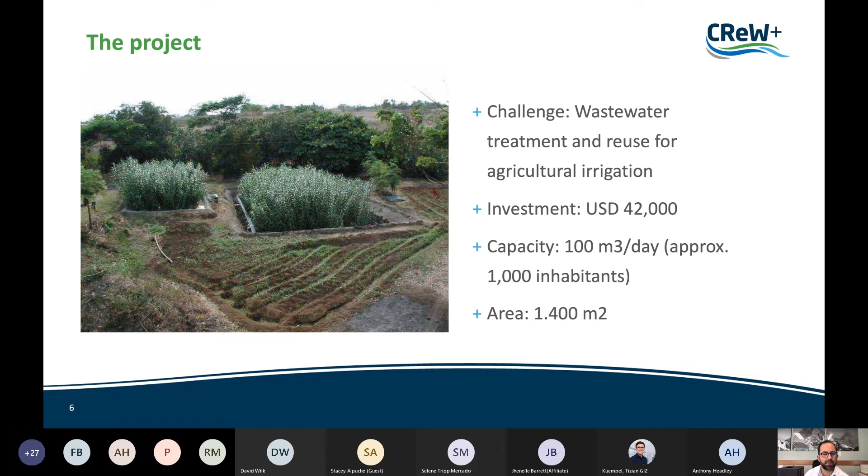Then the sedimentation tank, in this case an Imhoff tank, which we will also look at in more detail. In parallel, we separate the sludge that is sedimented in the Imhoff tank and also the grit chamber, and this goes into the sludge drying beds. After the primary treatment, after the Imhoff tank, then we have 4 constructed wetlands in parallel.

The idea behind this was to have 4 units in parallel to try different plants within the constructed wetland and evaluate the differences, and also to have more resilience in case one of the biofilters got clogged - then you have others to move the water through.

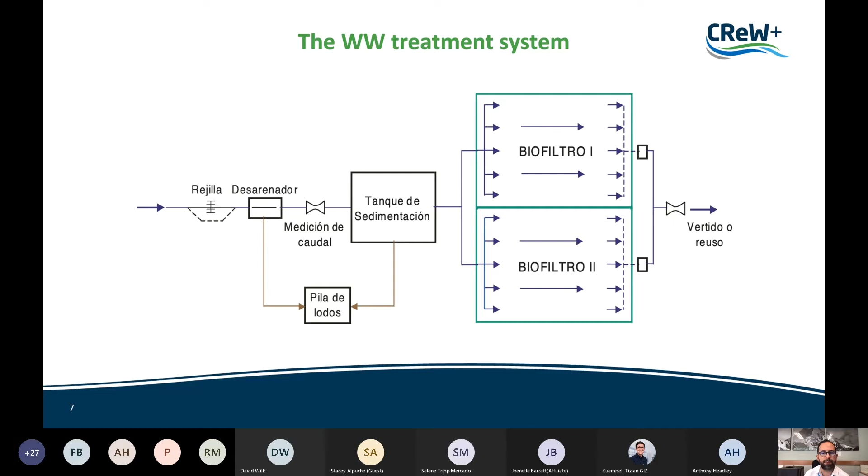Then we have the grit chamber, in this case a rectangular grit chamber, also with manual cleaning. Any sand material that would settle in a short period of time will settle here, and it won't go through the Imhoff tank or the wetland. The idea is that all heavy particles should be separated at the grit chamber.

As I mentioned before, it's very important to have some device to measure the flow of wastewater coming into the treatment plant, because without means for measuring flow, we'd be operating the plant without knowing how much water we're treating. If we want to determine the efficiency of the plant, the first measure we need is flow measurement—we need an idea of how many cubic meters per day we're getting. When you have a channel, you can use a Parshall flume to measure the flow, or a small weir. Or, more sophisticated, especially in larger plants, you can use an ultrasonic device to measure the water level at your inlet pipe or canal. But it's very important to measure and register the flow.

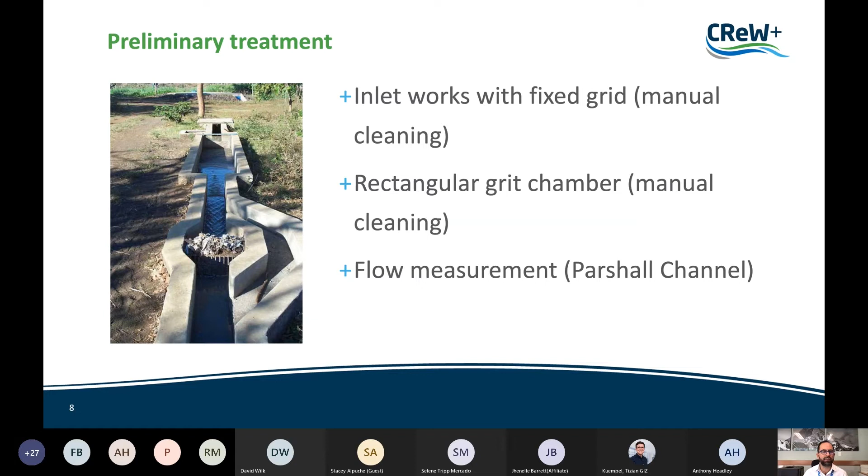Then we have the primary treatment, in this case an Imhoff tank. Imhoff tanks have been used for many years—a very well established, robust technology. In this case, the hydraulic retention time of this Imhoff tank is 2 hours. That means that, on average, water stays in the tank for 2 hours. It's not a batch process, of course, it's continuous, but one drop of water going into the tank will get out 2 hours later on average.

Because the flow also varies along the day or week, especially when working with anaerobic reactors, hydraulic retention time is very important to give the bacteria enough time to digest the wastewater. In a septic tank, for example, the time will be more. An Imhoff tank needs about 2 hours, and for an anaerobic upflow sludge blanket reactor, such as a UASB reactor, you might need between 6 and 8 hours retention time. So it varies according to the technology and specific design, but it's a very important parameter for designing any anaerobic reactor. It's also related to temperature—the colder the temperature, the longer the retention time should be, and the higher the temperature, the less time you need. So in places with tropical climate, you can save on total volume because you need less retention time compared with colder places.

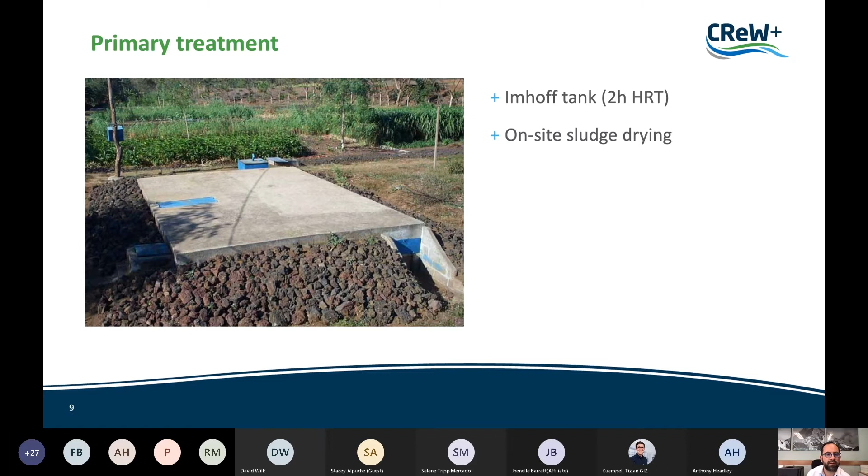In this project, there's also on-site sludge drying beds. All the sludge that settles at the bottom of the Imhoff tank can be taken out and brought to the sludge drying beds, where you basically dehydrate it. The liquid that comes out of the sludge can go back to the treatment plant, and once the sludge is dried, you can use it as a soil improvement, also for agriculture.

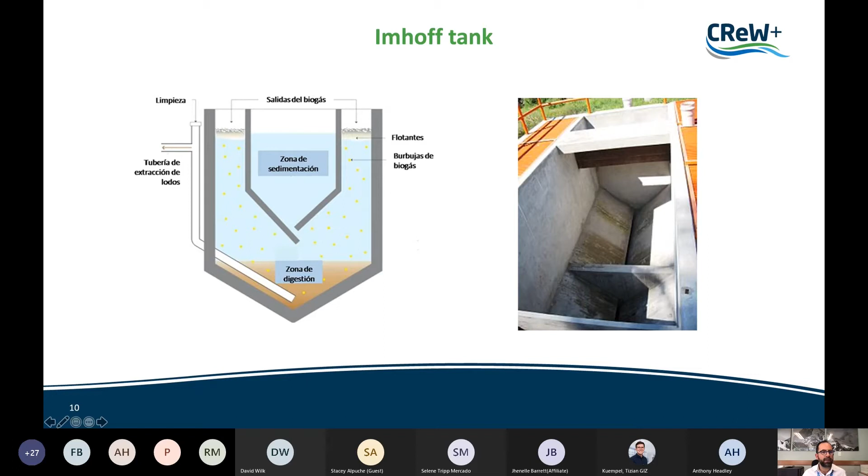On the picture on the right, you can see a detail of the Imhoff tank. These baffles are designed so all the scum and biogas go to the sides, while the clarified effluent goes to the center chamber. That way we separate the solids at the bottom—any fat, grease, or scum goes up to the sides, which are covered by this yellow lid. In the center, we have the clarified effluent that goes to the next step, the secondary treatment: in this case, a horizontal flow, subsurface horizontal flow constructed wetland.

This means that in this type of wetland, the water will flow along the wetland and underneath the surface. So that's what we call subsurface horizontal flow.

This is different from the vertical flow wetland. In the vertical flow wetland, we have a set of pipes on top of the wetland, and those pipes distribute the water, and the water will trickle all the way down. In this case, this is a horizontal flow wetland, so water goes into one extreme of the wetland and will go out to the other extreme.

You can walk within this wetland amongst the plants, and the pebbles here, the gravel will be totally dry because the water level is usually between 15 or 20 centimeters below the surface. So you can just walk on top of the wetland and everything will be dry. There's no odors, there's no mosquitoes because there's no exposed wastewater to the environment.

At the inlet of the gravel filter, we have a coarser gravel in order to ensure a proper distribution of the water using the full width of the constructed wetland. Then we have smaller gravel through the wetland, and at the outlet we go back to coarser, larger diameter gravel in order to ensure a good collection of the treated wastewater at the end of the wetland. And this pipe goes up in order to regulate the water level of the wetland.

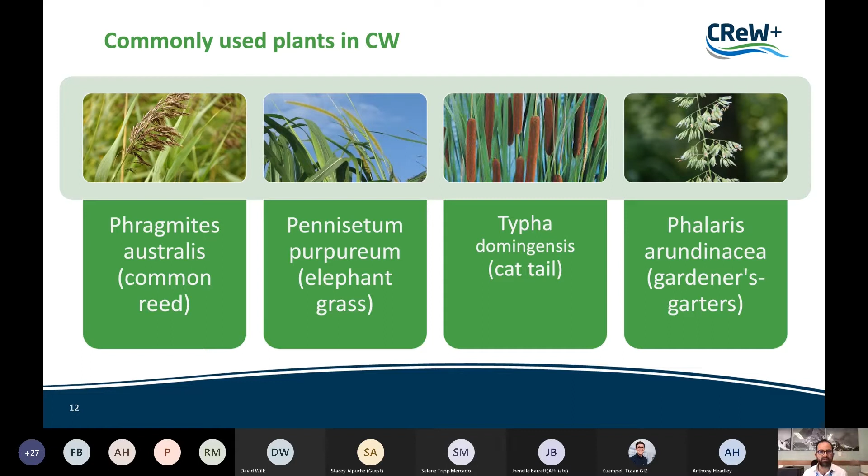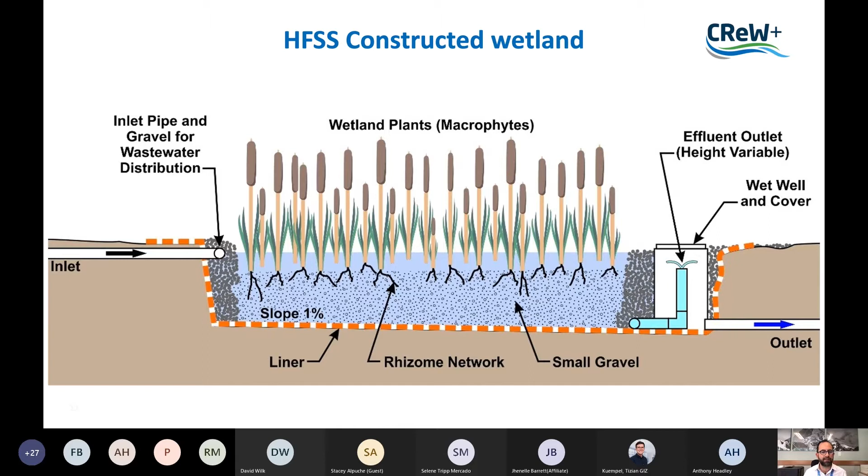Also, what the plants do is they get oxygen from the air, and that oxygen gets injected to the roots. So that is good for the environment of the wetland, so it's not so anaerobic. You get more oxygen into the wetland when you have a planted wetland like this one.

Now, about the efficiency, the treatment efficiency of these wetlands is very high, actually, as long as you dimension these wetlands correctly. You can get very high removal rates. For example, 98% here as an average of BOD5 reduction. So we can reduce 98% of the organic load coming into the wetland.

Now, these efficiencies here are actually for the entire plant, including the Imhoff tank plus the wetland, right? So in the lines in the graph here, you can see the work that is being done by the Imhoff tank to the center of the graph, and then the second part is the work being done by the wetland itself.

So as you can see, very high removal rates for BOD, COD, and total suspended solids, and less efficient rates for nitrogen and phosphorus removal. Although when you have a planted constructed wetland, then you get these numbers. If we didn't have plants, then we would come out of the plant with higher levels of nitrogen and phosphorus. So the plants themselves are taking up some of the nitrogen and phosphorus contained in the water.

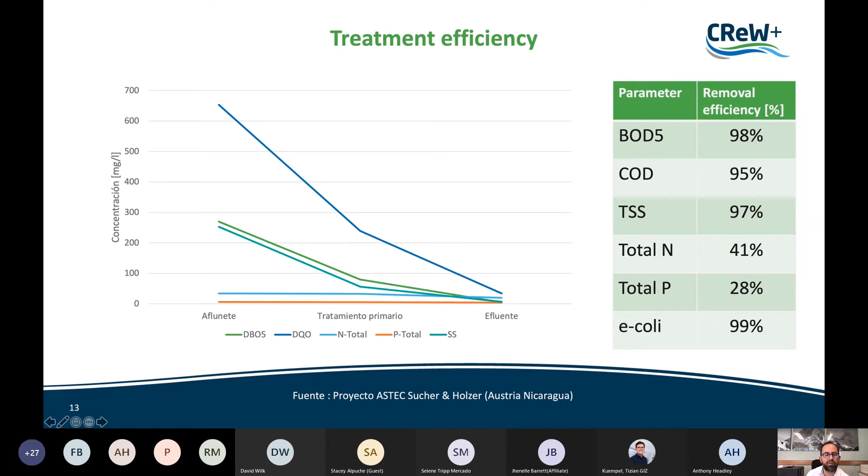Now, finally, E. coli removal rate is 99%, which sounds very high, but a 99% removal rate of E. coli is usually not enough to have a totally safe effluent. So even though we're removing 99% of E. coli, we will end up with some E. coli still left in the effluent, as we can see in this table.

So this table is to compare the absolute values, the concentrations of the wastewater at the inlet and at the outlet of the plant. And on the rightmost column, we can see the control value in Nicaragua, to which we have to compare the effluent quality, right? So for example, conductivity, we should leave the treatment plant below 2,000 of conductivity.

On average, this plant was removing salts to 546, so it complies, right? And as you can see, all the measurements, all these parameters comply with the norm.

Now, this standard in Nicaragua is for general discharge and for reuse when you discharge the treated water to the ground. If we were to discharge to a lake, for example, these parameters would be much more strict. For example, instead of having a control parameter of 120 milligrams per liter of BOD, if we discharge to a lake, maybe this would go down to 20 or 30 milligrams per liter, much stricter limits in order to prevent pollution to lakes.

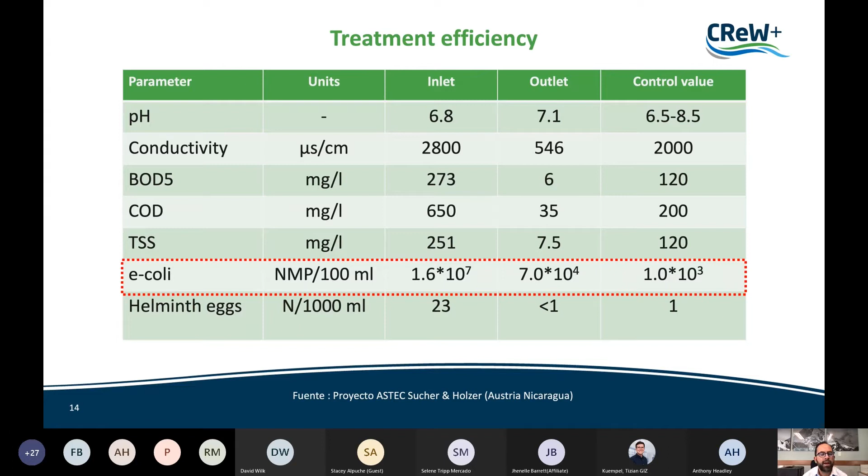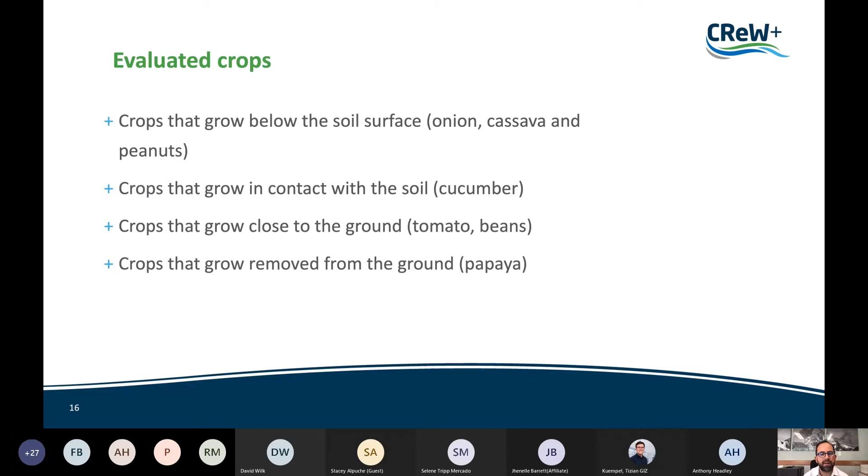And here are some lessons learned from this case. First of all, plants take advantage of the nutrients, nitrogen and phosphorus, which are present in the effluent. No additional fertilizer was used in this case, so all the crops took the nutrients from the wastewater and, of course, from the soil.

We can see the conservation of water resources here. The reuse of water reduces the pressure on surface water sources, also on treated water. In many countries in the Caribbean region, there are desalination plants which use a lot of energy, and you end up with very expensive water. So it's much cheaper to irrigate with this type of water, or any wastewater you reuse for irrigation will reduce pressure on these other expensive water sources.

Also, the water flow in a treatment plant, especially if this flow comes from wastewater from a bunch of houses or a small population, is very reliable and stable during the year. This allows farmers to produce all throughout the year when you have appropriate weather conditions. The flow is very steady, so the water offer is very stable.

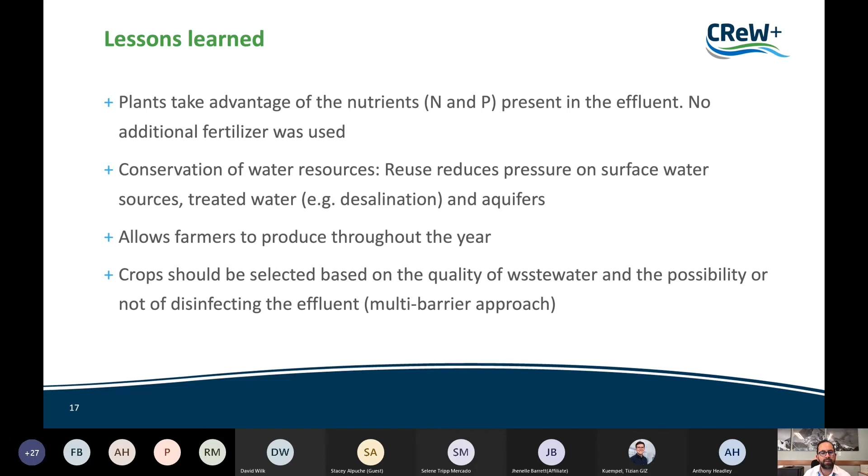And finally, crops should be selected based on the quality of the wastewater and the possibility or not of disinfecting the effluent. So this is where we use this multi-barrier approach that is recommended by the World Health Organization. The crops recommended for restricted irrigation, when you don't have a disinfection step, are vegetables, fruits, and basic grains that are washed, peeled, or cooked before consumption, industrial crops subject to drying, roasting, or extraction processes, fruit trees, and also tall stem plants and forage for animals. All these crops are appropriate for wastewater reuse for irrigation when you don't have a disinfection step.

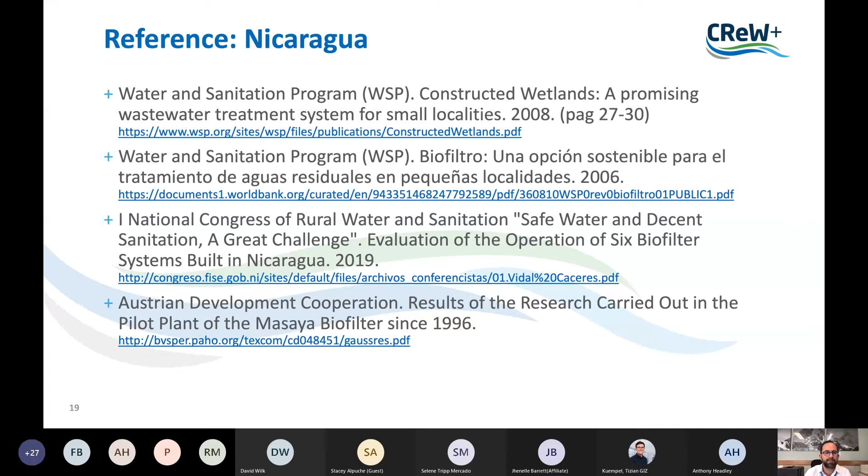As I mentioned before, this is a very well documented case, so you can go into these links and look at the detailed monitoring process of these plants, the removal efficiencies, the differences between crops, and so on. So this was the first case from Nicaragua, a very appropriate technology for tropical climates, the constructed wetlands.

Next we will look into an NGO project. This NGO is called Soil in Haiti. They have worked since 2009 in Haiti. Soil means sustainable, organic, integrated livelihoods—a very sustainable ecological approach. In this case, they base their operation on urine diverting toilets. The challenge they faced was to provide sustainable sanitation at very low cost where there were no sewer networks. And they worked all through the earthquake in Haiti, so this also works as an emergency technology.

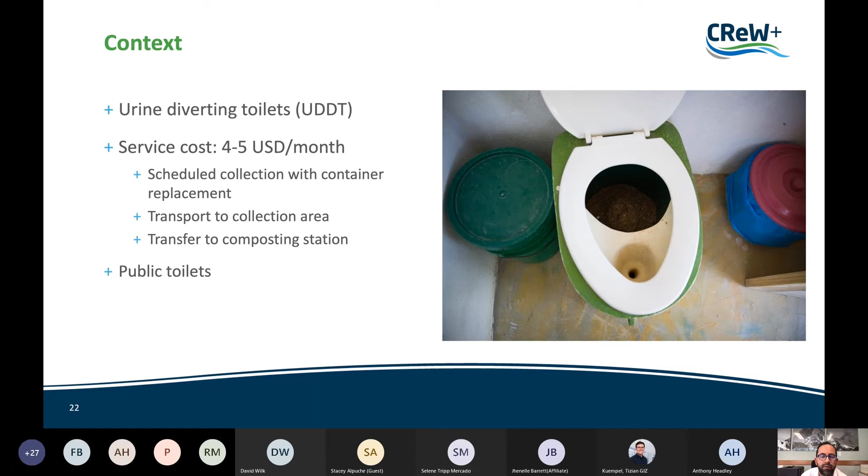There's another bucket within the toilet that has to be periodically removed. But interestingly, when you separate urine from the feces, you don't have bad smell problems, because the problem is when you mix the feces and the urine, you get a very liquid effluent, and then the ammonia from the urine especially starts smelling very bad. So as long as you infiltrate the urine or lead it towards a closed container, and you have sawdust on top of the feces, you don't have any problem with bad odors or flies.

The first composting station built by Soil took place in 2009. Soil has carts and trucks to pick up the sludge from the households, and then they take this to a composting station. First, all the excreta plus compost is placed in wooden boxes for a 2 or 3 month period, where the composting continues. After that, it's transferred to composting piles for about 6 months. Each composting station processes more than 50 tons per month.

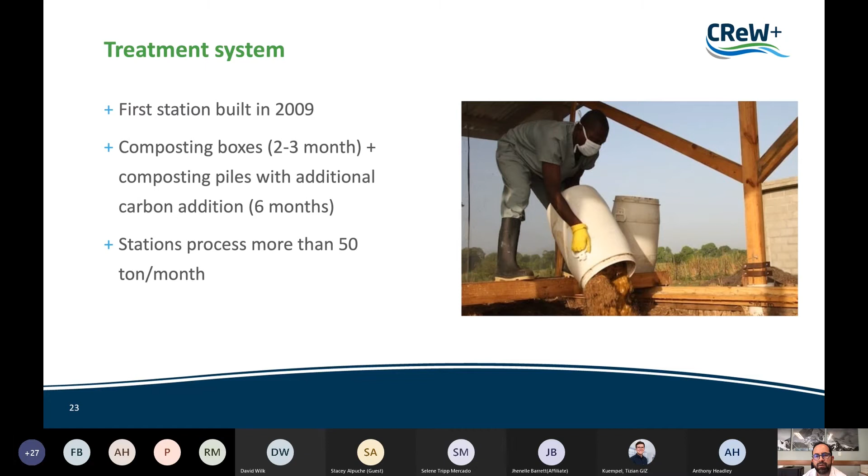While the composting process takes place, the temperature goes up close to 50 or 60 degrees, so all the material gets disinfected because of the high temperatures.

Here are some numbers on the main investment costs of this type of system. The composting plant itself costs about $150,000. The trucks were around $25,000, and the small carts around $200. So small carts do the collection from each household to a centralized place, and then from that centralized station, the big truck takes it to the composting station.

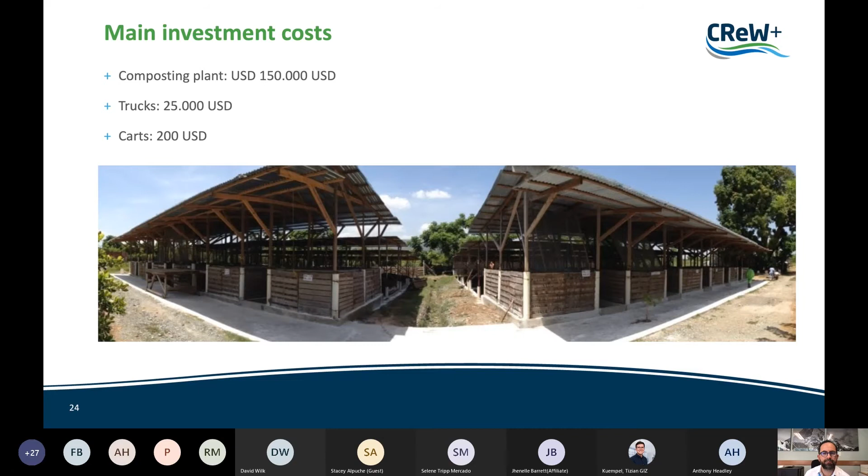The challenges they face are to improve the efficiency of all their processes, and they are considering subcontracting some of the activities so they can gain efficiency.

Now we can take a look at a very short video from Soil, featuring Sasha Kramer, the founder of Soil in Haiti.

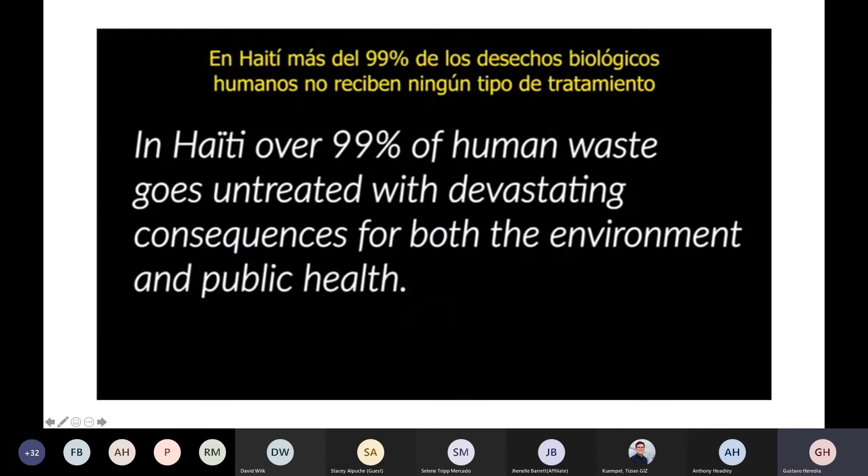In Haiti, over 99% of human waste goes untreated, with devastating consequences for both the environment and public health.

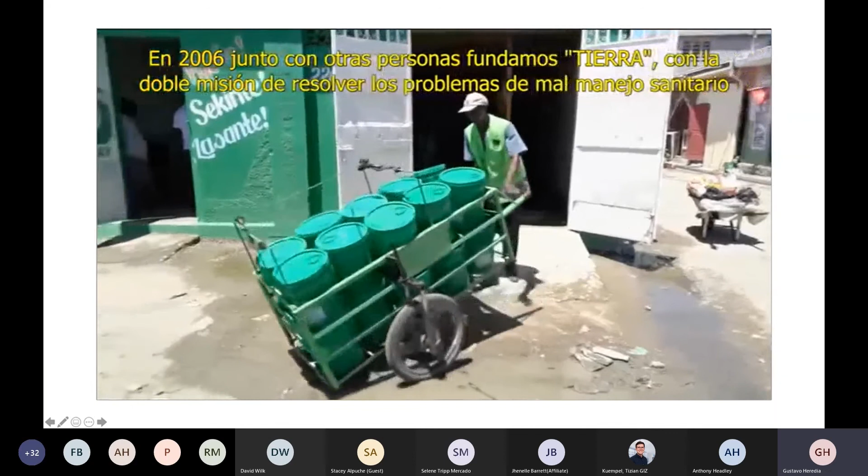In 2006, I co-founded Soil with a mission to simultaneously solve the problems of poor sanitation and declining soil fertility by closing the nutrient cycle and using the nutrients from human waste to restore soil fertility.

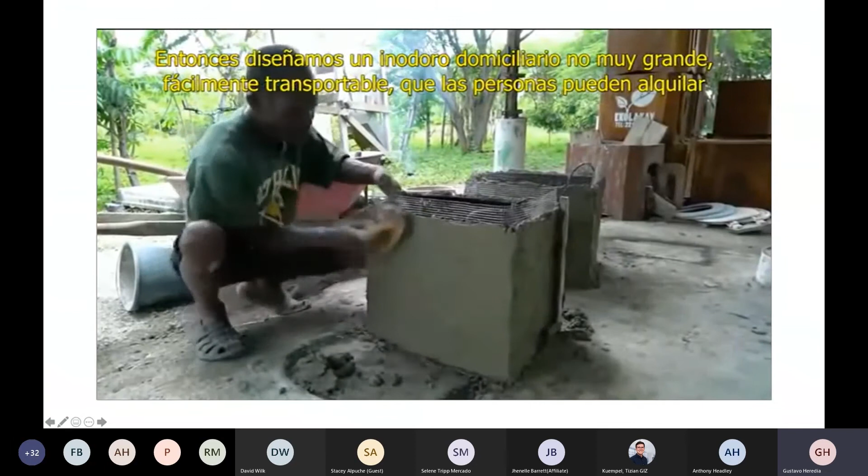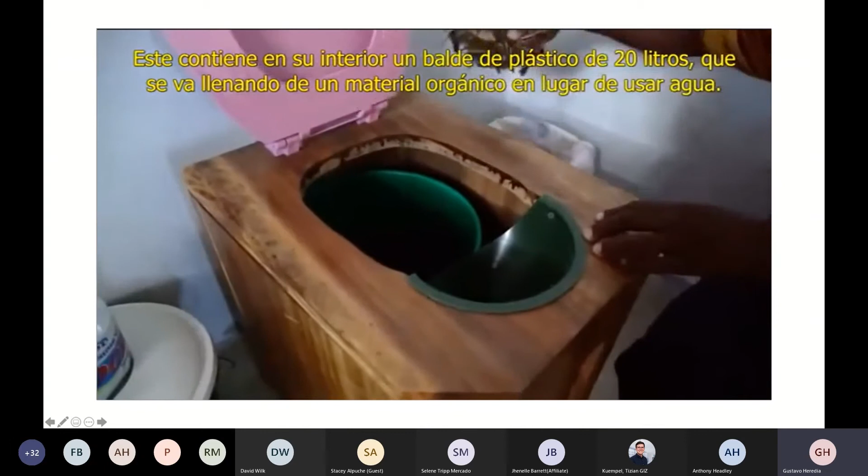So what we do at Soil is that we've designed a small portable household toilet, which people rent for about $4 to $5 US per month per family. The toilet has a 5-gallon bucket in it, filled with a carbon material that's used for flushing. Once the bucket is full, we take it away to our compost site where it is treated and transformed.

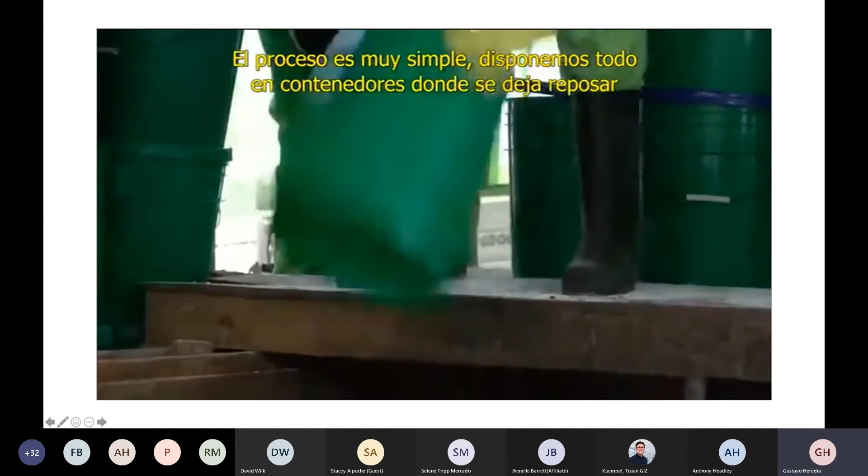It's a very simple process in which we just dump the waste into a bin, and then we step back and let the soil microbes do their work. When there are so many of them in there, it actually heats up the waste to a really high temperature, which kills all of the pathogens that make people ill. In 6 to 9 months, we have an amazing finished product that can go back onto farms to restore soil fertility without having to rely on chemical fertilizers, which take a tremendous amount of fossil fuel to produce.

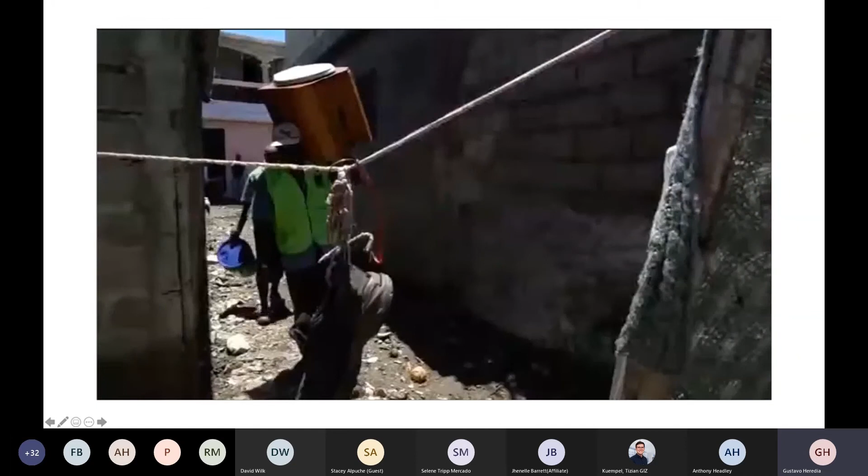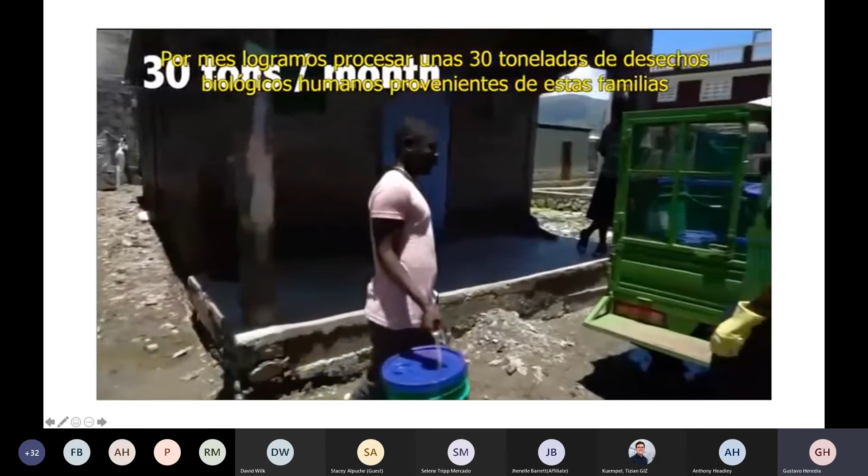SOIL started our household toilet program, called EkoLakay, in 2013. We currently have about 5,000 people using our household EcoSan toilets. From these families, we're treating 30 tons of human waste every month and producing between 5 and 10 tons of compost that we can then sell at the compost site.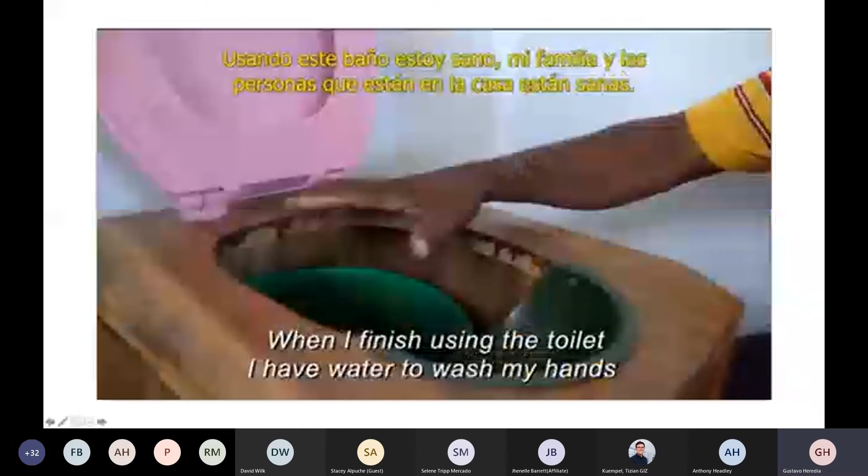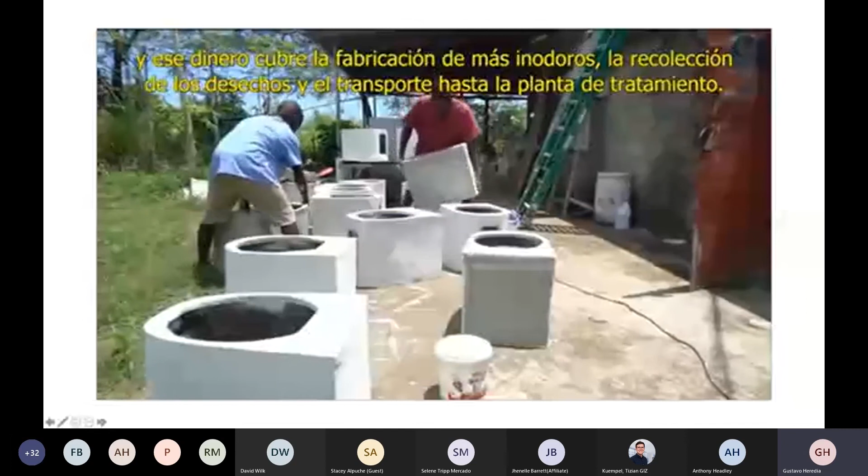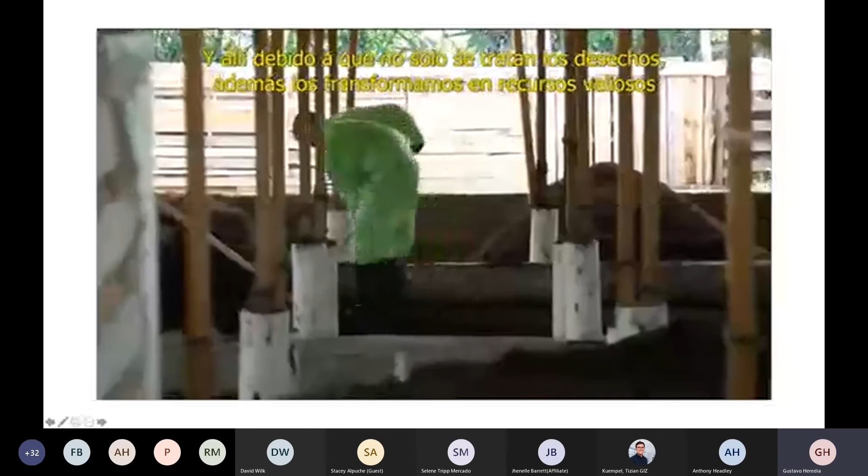Soil's work is to really create a sustainable business model for sanitation provision in dense, informal urban settlements. The way the business model works is that people pay a small monthly fee for this toilet. They don't pay the cost of the toilet; they rent it and pay on a monthly basis. This fee covers the production of the toilet, the collection of the waste, and the transport to the treatment site. And at the treatment site, because we're not only treating the waste but also transforming it into a valuable resource, we can generate revenues to cover waste treatment costs through the sale of compost.

Our vision at Soil is that in 10 years, it will no longer be Soil operating this program, but that the research and development work we've done will have been picked up by private entrepreneurs and communities, not only in Haiti but around the world where solutions like this are needed. These entrepreneurs will be able to make a sustainable livelihood, providing dignified sanitation to people who need it, but also to re-envision the way that we do agriculture.

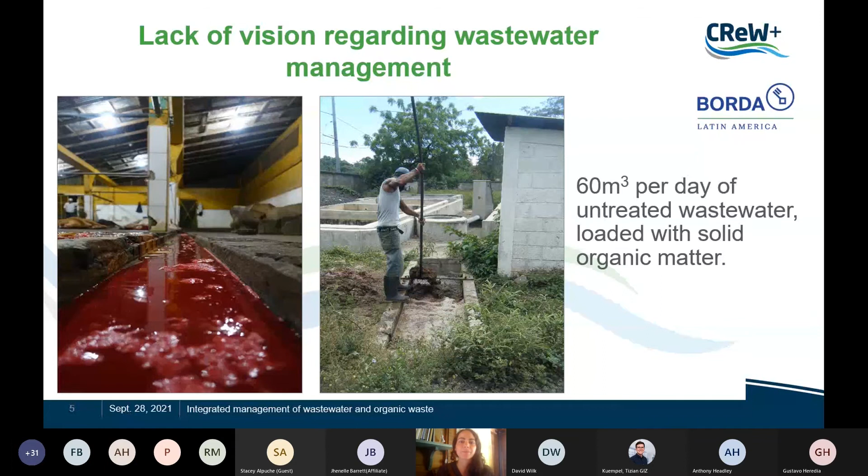Also, there was a lack of vision regarding solid and organic waste management. There were 1 to 1.5 tons of solid organic waste generated every day, and this was all disposed of in an uncovered municipal landfill. Workers were dealing with all this waste directly and with very limited personal protection equipment.

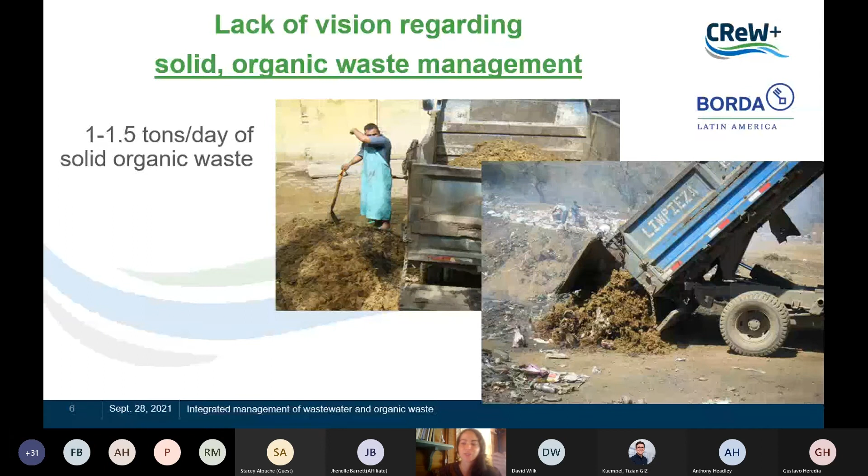The premises where this slaughterhouse is located used to have a vacant lot of 1,200 square meters, which was in disuse, and we decided that this was a space that needed to be used for a better purpose.

For the strategic plan and execution of the project, this was initiated by the municipality and the management department of the slaughterhouse. They knew of the social pressure urging for an improvement of how they were dealing with this waste, so they reached for counsel and advice through the cooperation programs they participated in. This is how they got to Borda through the Hamburg City Twinning Project, and we also included the university as part of the stakeholders contributing to this project.

All the stakeholders worked together on developing a strategic approach for a comprehensive solution to the problem. This solution needed to be based on three premises. The first was that the solution needed to be long-term and sustainable, meaning it couldn't be just a quick solution. It needed to be well thought out and well planned in order to take into account all the specific characteristics of the project and develop the best solution.

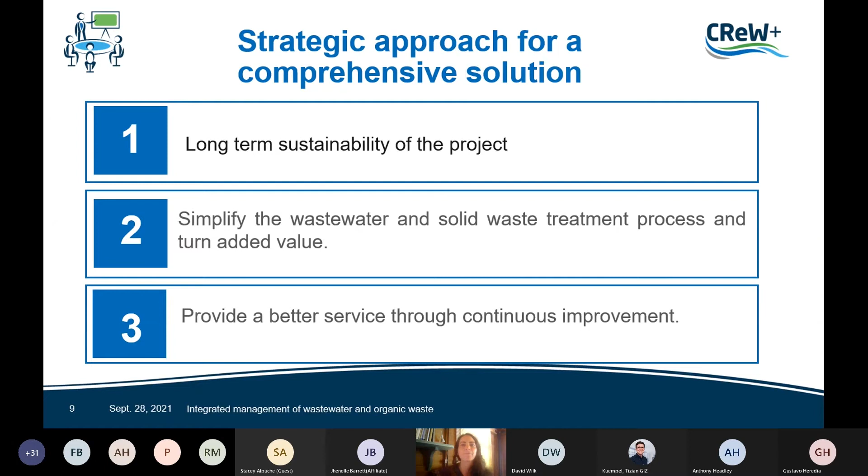Before building or designing anything, we needed a better understanding of the effluent water. So we conducted an analysis where all the different areas of the slaughterhouse were analyzed, taking into account the different characteristics they bring to the effluent: from the slaughter waste, the cleaning of the slaughter cells, the cleansing of the guts, the leather and skin processing, and the guts and belly, which includes washing the manure. The total amount of wastewater is 40 to 60 cubic meters per day.

From this analysis we found that blood was the highest pollutant, with a total COD of 375,000 milligrams per liter, followed by livestock manure, the second highest pollutant because of its contribution to the total dissolved solids in the wastewater.

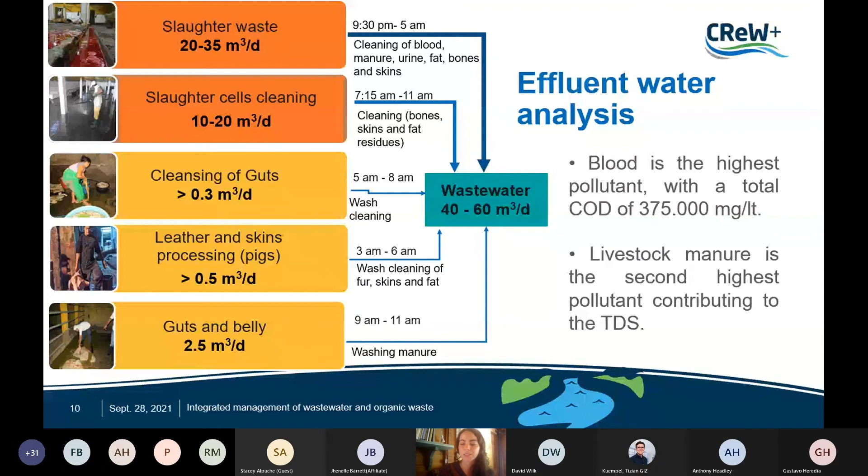After understanding the wastewater we were getting, we designed and implemented this system. At the beginning, it originally worked with one biodigester, where the biogas was contained for further reuse in the slaughtering processes. All the solids from the biodigester were taken into a drying bed, while the water went into a baffled reactor, an anaerobic filter, which also had a containment for the biogas generated, also for further reuse.

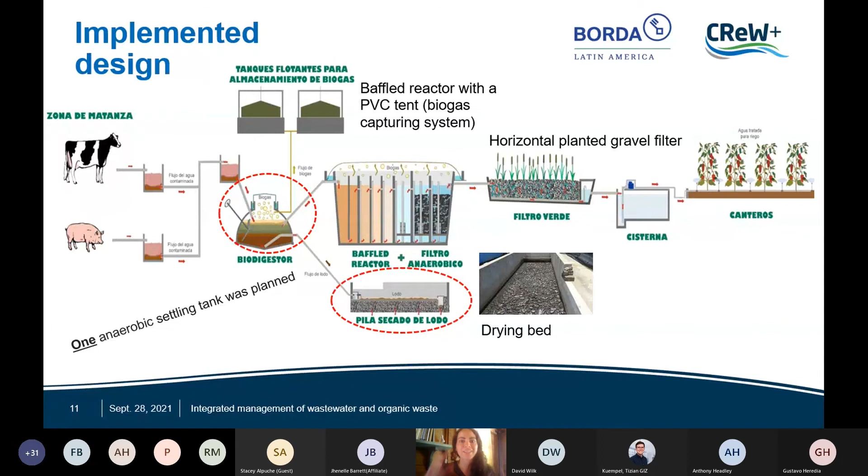Then the water was led into a horizontal planted gravel filter, a tank, and then reused for irrigation of the crops in the orchard that we also built on that large vacant land I told you about before.

So the project was running like this for a bit, but we soon realized the importance of a sustained improvement method, where we need to plan, implement, but also very importantly verify, identify any problems or issues, and take corrective measures.

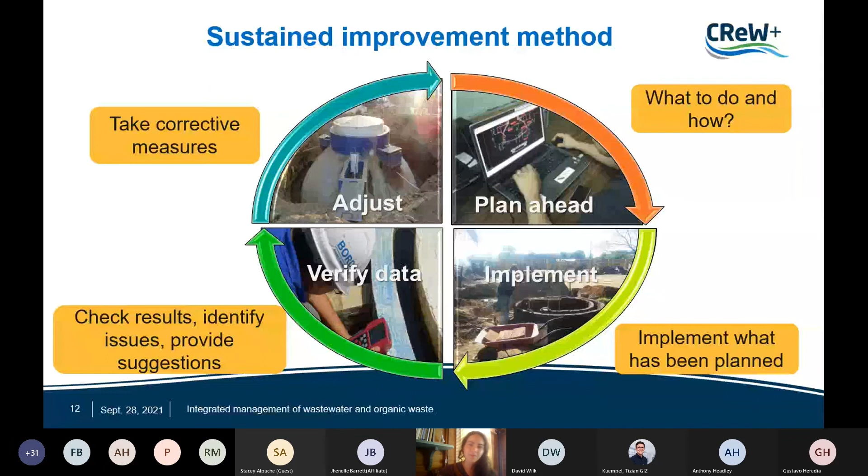In this case, one of the first issues that we noted was the rapid formation of floating sludge layers in the anaerobic reactor. This was because of the huge amount of organic matter coming in, and because of the fact that we only had one biodigester.

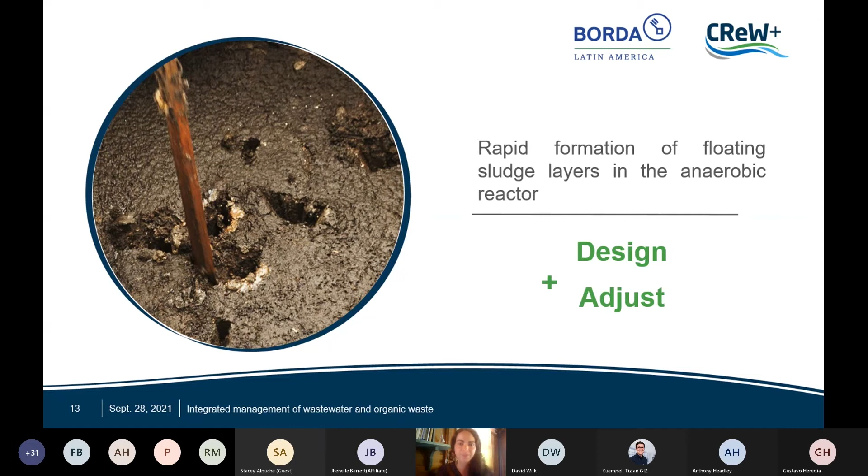So this is where we can realize the importance of the design, but also of this analysis through the pilot projects, and also adjusting to improve the performance of the systems. That's how we got to conduct these adjustments, these improvements of the system.

We added separated wastewater flows so we can have different first treatment systems for each of the areas of the slaughtering. We also added a screen for greater retention of the solids, a grease trap also, and we added 2 more biodigesters so we can improve the capacity of our first treatment.

The biogas again was contained and used afterwards as part of the processes in the slaughterhouse. We kept our anaerobic baffle reactors, anaerobic filters, with the containment of the biogas.

We needed to make some changes in the filter gravel. The problem here was that we were getting a lot of sludge still in the artificial wetland, so we needed to make some changes there also, because it was getting clogged still with all the grease from the blood. So we also made some changes there.

We added some solar power pumps for the irrigation system and also a biogas incinerator, which is also needed as part of the slaughter processes.

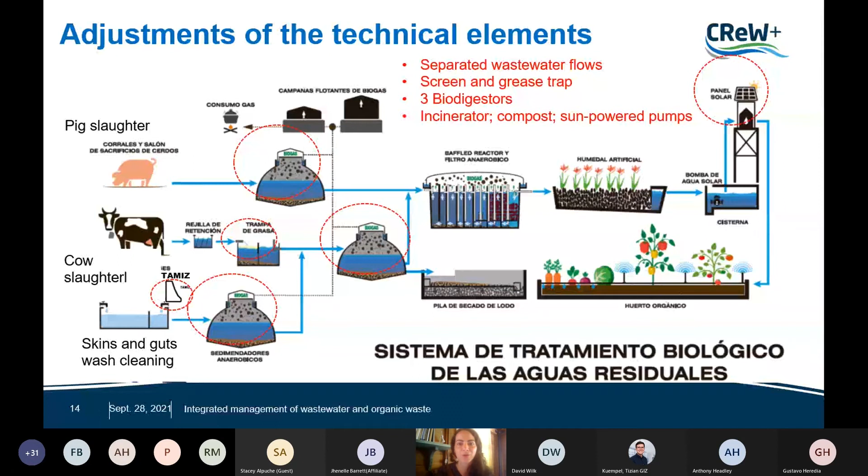So we added this solar power pumping system, which took the water from a tank to an elevated tank powered with solar pumps, and then it was led to the orchard and used by a drip irrigation system.

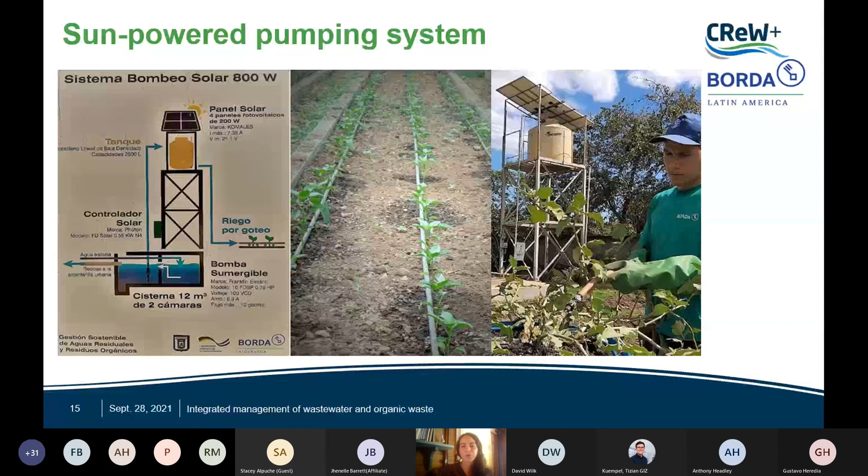This is a diagram of how the reuse system is working now. So after the treatment with the different steps that I already mentioned, the water goes into the artificial wetland and to the elevated tank, and afterwards it's being released in the seed beds of the orchard by a drip irrigation system. This is important because we don't put any water over the plants directly, but over the soil.

And for the organic solid waste, we have this compost yard where we take the sludge that went to the drying beds, from the biodigesters to the drying beds. Then it's taken into the compost yard. It goes into a vermicomposting system, also a storage room, and also a shredder. The shredder allows us to manage better the compost and also take it into sale and also use in the orchard.

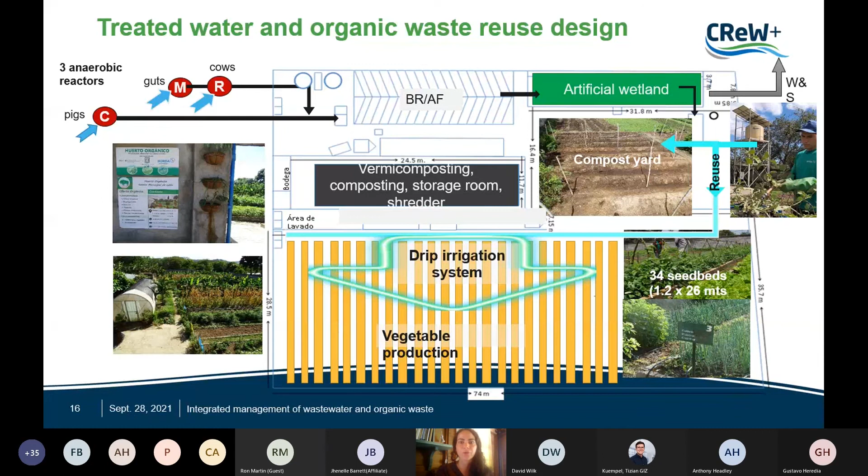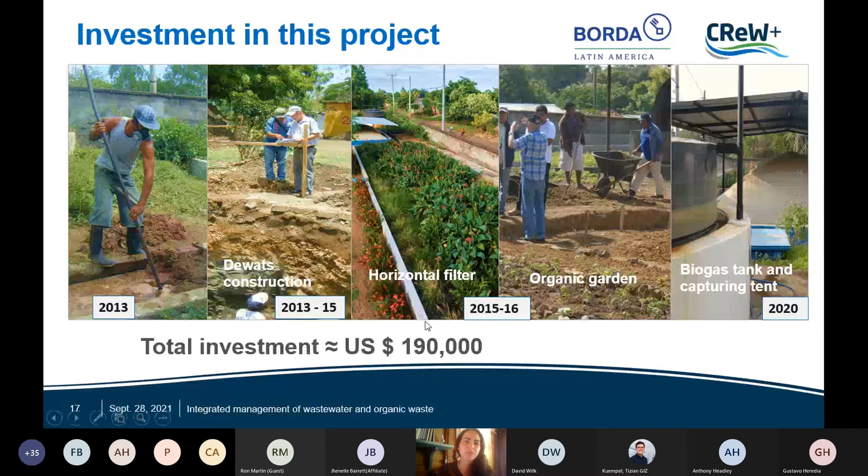So this project was developed and implemented through different phases since 2013 till 2020, and it's still running. The total investment only for the construction was about $190,000 US dollars.

Some of the outcomes and benefits, impacts of this project—well, the most important one, I think, is that 16,000 cubic meters of water is being treated every year. This is water that now is not going untreated into the river, or better off, it's being reused for the irrigation system and also for irrigating the compost when needed.

And the rest of it, that's not being used in the orchard—in the orchard we use about 35% of the wastewater that's being generated, because the water is too much for being reused. Also some part of it, 65% more or less, goes into the sewer system, but now it's completely treated and in compliance with all the industrial wastewater discharge parameters for Nicaragua.

We are also reducing the environmental pollution and also the bad smell that the neighbors were complaining about.

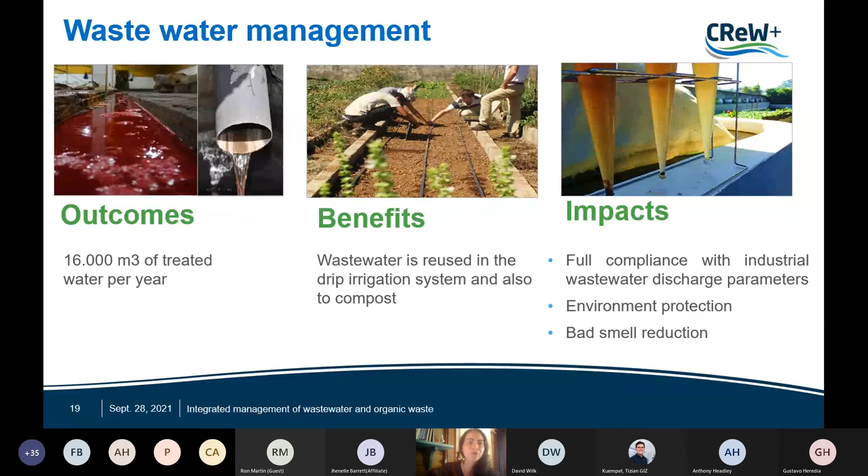For the solid waste management, 400 tons of organic waste are being transformed into compost every year. This compost can be used in the orchard, but also it goes into sale. In this way, we are reducing the amount of waste that was going into the landfill. Now there's no solid waste going into any landfill, and it's all being reused for either the production of vegetables or for sale.

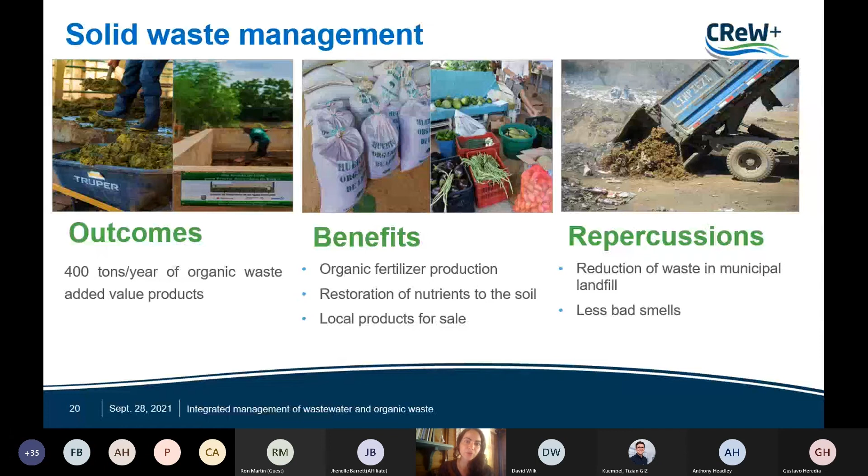Another benefit of the system is the biogas production, which is about 3,500 cubic meters of biogas per year, which is again reused in the slaughtering processes, representing a cutback of 5,500 kilograms per year of firewood that was used to heat the water. And also now we have the biogas incinerator, which is also hugely needed in this kind of infrastructure.

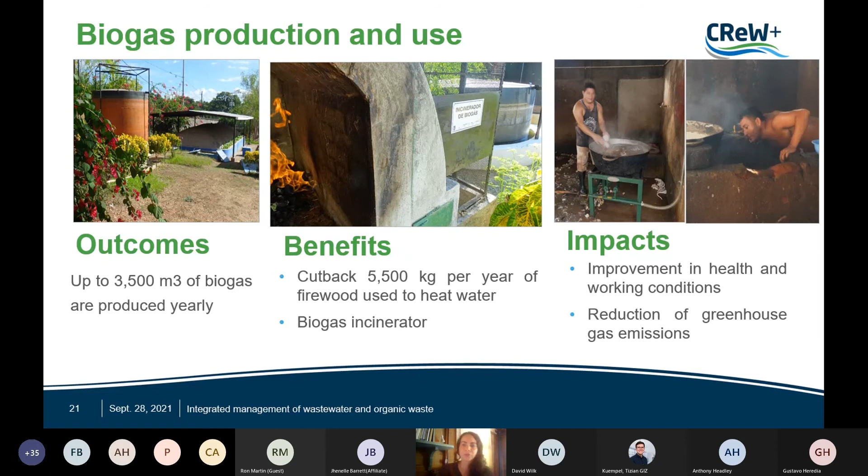Again, some of the positive impacts is that we are improving the health and the working conditions in the slaughterhouse, and also reducing some of the greenhouse gas emissions.

And well, the bonus is that with the sales of the different crops and the compost, we are getting about $7,000 per year, which doesn't mean that our aim was to recover all the investment only with the incomes of the organic products. It's like a plus with this kind of project, that we can generate some product that we can sell and also help the management and the running of the slaughterhouse with this income.

Some of our lessons learned through this project is that the local government gets highly engaged with the achievement of this project, and it keeps interested in maintaining and sustaining this kind of project. We work with an interdisciplinary team building approach, which also meant building strategic alliances and the involvement of different stakeholders, including the universities.

We came up with an integrated solution with an ideal vision of adapting to the current situation and the current needs. We also learned that not everything comes out as planned, but it's very important to analyze why it didn't work and what we can do about it.

We also consider it important to anticipate some budget for any adjustments needed within the process in order to ensure a successful project and also improve the performance of the systems. Also, it's very important to provide a monitoring system that ensures long-term operation and maintenance, and to adapt the technical solutions to the capacities of those in charge of operation and maintenance, mostly the local capacities of those responsible for these activities.

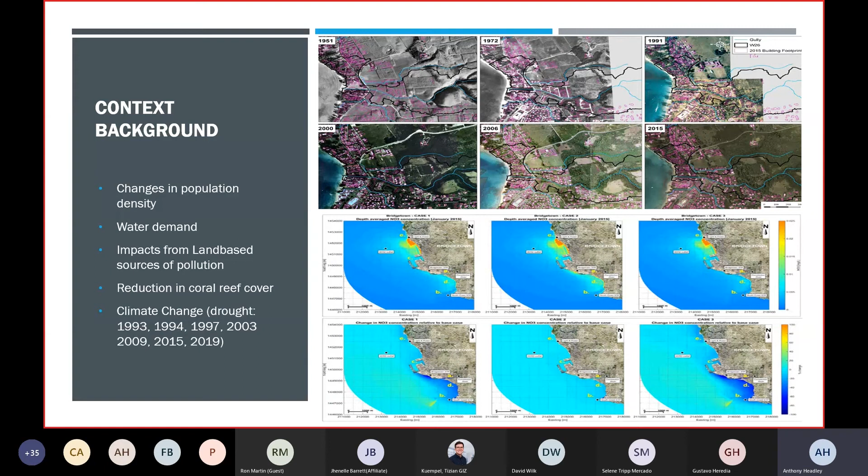And drought issues for Barbados as well, where we have seen over the years several periods of drought that have driven to some extent this process and pushed the need to start looking at all sources of water that are available to us.

Another driver in terms of water reuse is that several facilities in Barbados have actually, based on the availability of water and the cost of water, noting that all of our water for domestic purposes is taken from groundwater sources, which involves pumping from the groundwater aquifers, which is very expensive because of the cost of electricity in Barbados.

So we've seen within the hotel sector, residential sector, and primarily based on the advocacy of both the EPD, Ministry of Health, and the water authorities between 1995 and 2010, several facilities actually started putting in wastewater treatment systems and using some of that wastewater for reuse in terms of irrigation.

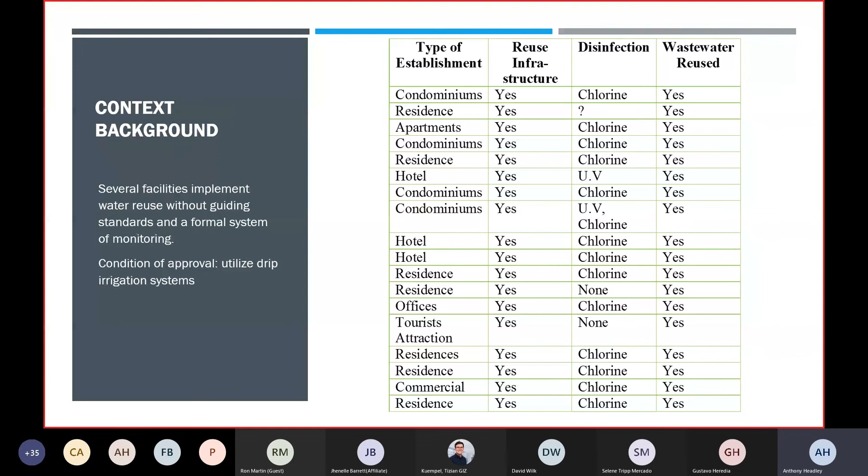The primary tool that was used would have been the Health Services Building Regulations for control, and the main condition was utilization of drip irrigation systems. So a lot of facilities that undertake wastewater reuse have done so generally without a formal system of standards, as well as a system of monitoring.

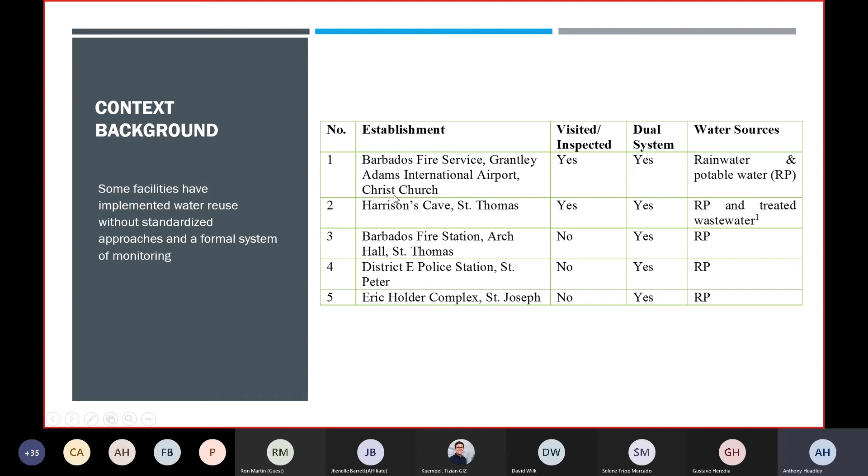Some of the government facilities that have installed wastewater treatment systems or rainwater systems and have looked at wastewater reuse are highlighted here. The one that we will be looking at today will be Harrison's Cave, which is a special area in Barbados that's fairly important to our tourism sector.

These are the legislative tools, and as I indicated, the Health Services Building Regulations and the Town Planning Act would have been the primary tools used to control water reuse in those initial stages, still being used as we speak. But unfortunately, they do not address all of the issues that are associated with water reuse, and particularly some of the health concerns.

Supporting those regulations would have been the existing groundwater protection policy, which is the diagram on the left, and that has been updated in 2020 to the diagram that you're seeing on the right.

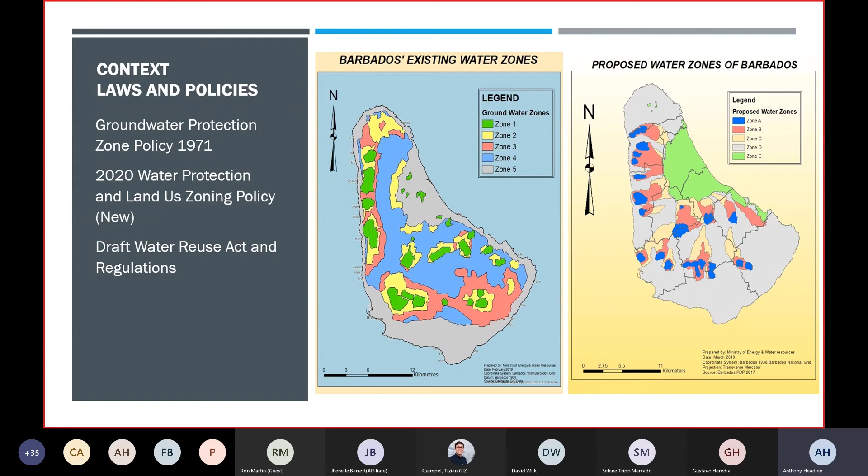Historically, when looking at the diagram on the left, the gray area along the coast, there are no restrictions with respect to waste disposal. This was classified as Zone 5, and disposal would occur from the residential property directly into what we would call a suck well, untreated, where primarily treatment of waste would have occurred in the ground, either through filtration and natural biological processes.

So some of the primary drivers towards the wastewater reuse policy would have been public health, given that it was being practiced within the country, and there were concerns with respect to cross connections, particularly between those facilities that did wastewater treatment and connections to the potable water supply system on property.

No structured legal institutional framework specifically looking at all the areas to ensure safety of wastewater reuse. Then the other driver would have been the Cartagena Convention and meeting the requirements under the Cartagena Convention, and generally to augment the water supply within Barbados.

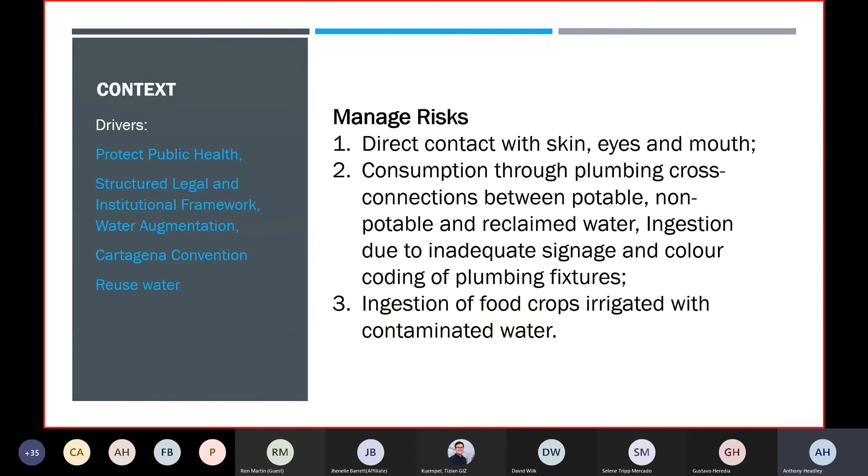So if we can use available water, have it treated to an acceptable quality, then domestic potable water that is expensive, we don't necessarily need to use that, which is of very high quality for all the purposes that we use water for. So those were the drivers behind the development of the water reuse policy.

The approach that was taken with respect to this policy was that a consultant was hired back in 2005, and that consultant basically was given the mandate to update the West Coast Sewerage Project Master Plan and to do a cost-benefit analysis on that plan and look at the different options that were available to us.

This was done through a technical review. We had 3 stakeholder consultations, extensive consultations with a variety of players in the field, including the architects, the engineers, and the farmers.

The output of that particular study, and as you can note the dates, the draft water reuse was in 2006, and the cost benefit analysis looking at the different options in terms of water reuse was in 2008.

I'm getting some feedback. Okay, thank you.

Coming out of that study, I just would mention some of the challenges here during the development. A number of administration changes occurred, and after each change of the administration or change in the government, we had to set out afresh the case.

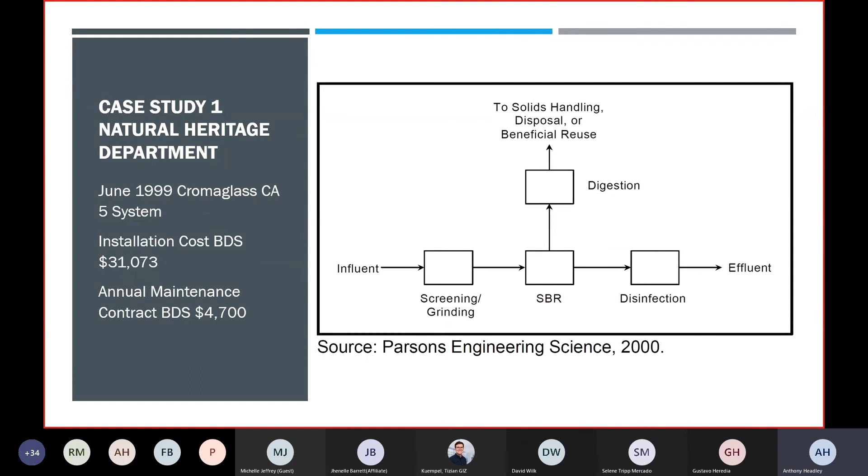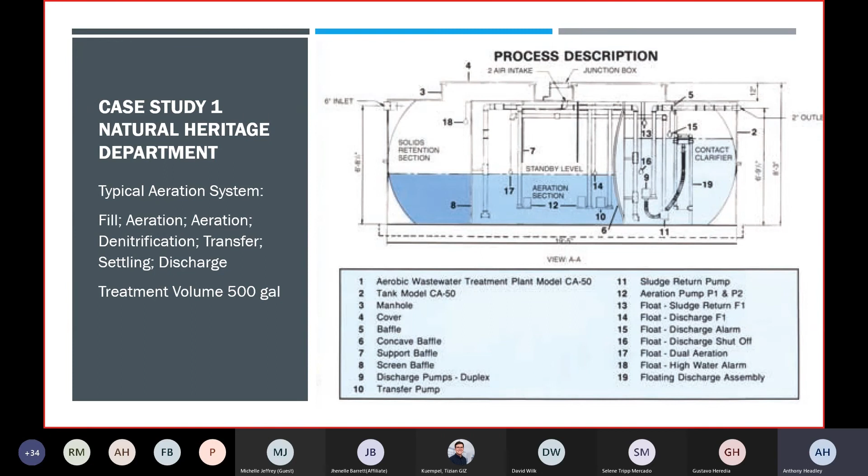So these are the technical specs of the package treatment system. The initial chamber provides the holding for solids, the inorganic solids. The second chamber provides for the aeration, and the baffle, as indicated here, is a perforated baffle that allows continuous connection between the two, and the final clarification chamber. It's basically a batch operation, 6 to 8 hours treatment time prior to clarification and discharge of the effluent.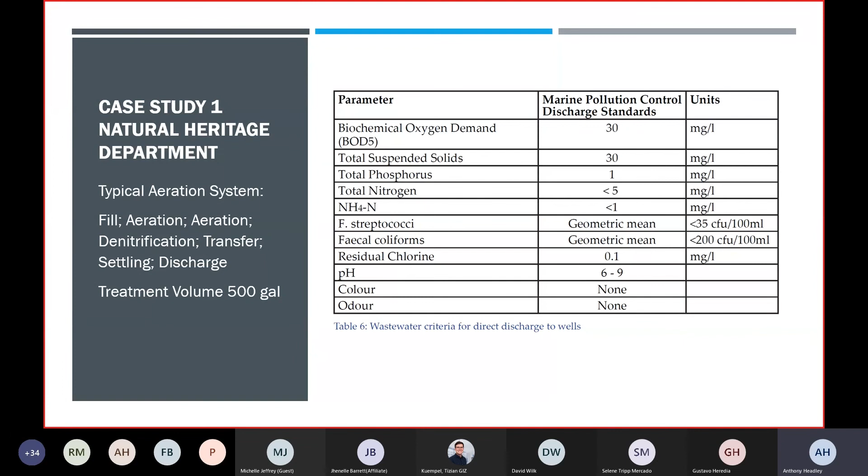The standards used, and our initial monitoring during commissioning and the first few months of monitoring the treatment system, indicated that it complied with the standards set under the conditions of approval. Our challenge now in monitoring these systems is generally the laboratory capacity in Barbados for evaluating plant performance efficiencies. The lab had indicated for quite some time, due to significant cutback in staff, that they were not capable of doing the continuous assessments required for all the treatment plants we currently have on island.

Right, our second case study is again Harrison's Cave. Specifically, this is the number one national tourist attraction. It's located, similar to the Natural Heritage Department, within the zone of special environmental control. We have, during the high days, as much as 179,000 persons visiting annually.

That is at a low now of around 100,000 persons since 2013, and because of the coronavirus and its impacts, the visitor numbers are certainly down significantly. But these were some of the drivers for the installation of the package treatment plant.

The property is really a small property, and part of the reason as well was that the cave, though very spectacular, was having significant impacts from pollution in terms of tarnishing of the stalactites and stalagmites. On some days there were odors generated from water entering the cave, and hence government needed to start looking at solutions. The Natural Heritage Department, being project manager for the Harrison's Cave project, was demonstrating the importance of wastewater treatment and improving the quality of water entering the cave from developments above and surrounding the cave.

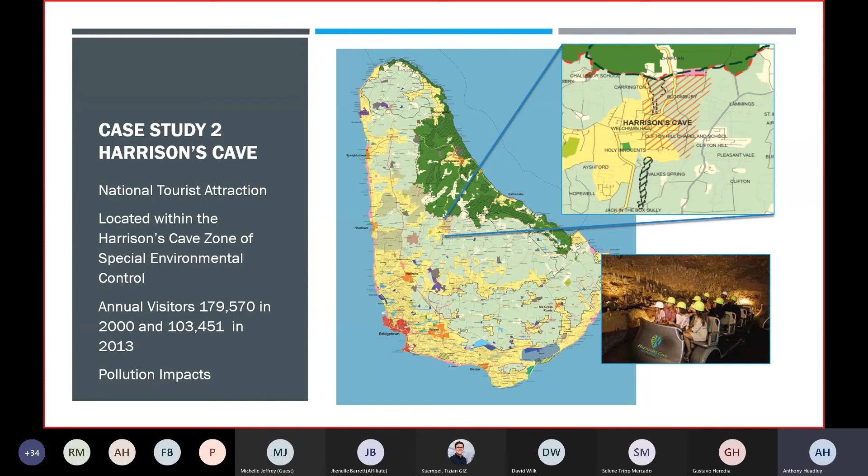A second part of the impact would have been agriculture. A decision was taken, given the size of the property, to look at a package treatment system. In this case, persons were very concerned about the quality of water entering the cave, particularly from the study done by Dr. Mwanza and the impacts we're seeing there.

For those who have visited Harrison's Cave, the entrance to the cave is an artificial entrance created within the cliff face. So it's a two-level type system, with one treatment plant and a second treatment plant at different levels within the plant. Because we wanted high quality effluent, ultrafiltration systems were chosen, so the ZeeWeed 500A membrane bioreactor was selected.

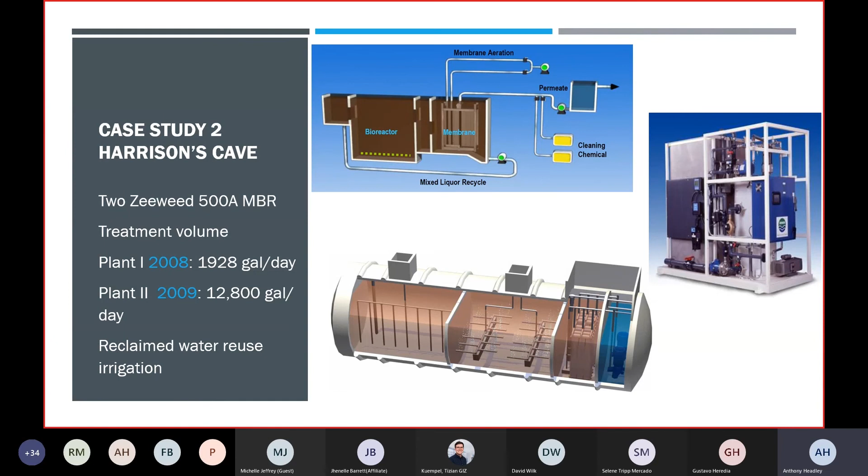These are typical examples of the layout. The structure on the right is actually located on top of the treatment plant system, which contains the controls. The irrigation water, the reclaimed water, is used to irrigate all the plants on the property. The drawing on the right shows the different arrangements in terms of process flow.

So there's the trash trap, the equalization tank, given the significant change in the number of persons visiting Harrison's Cave on any day. It was thought that an equalization chamber, for stabilizing flows going to the aeration chamber, was very necessary. Hence an equalization tank was installed to control the flows.

As indicated, this was part of a multi-million-dollar project. I wasn't able to get the specific cost for this, but from other systems in Barbados, the range could be between 800,000 Barbados dollars to 1.2 million.

Similar to the Natural Heritage Department, we insisted as the regulatory agency that the company managing Harrison's Cave have a maintenance contract. That's one of the benefits we've seen throughout the years from the conditions of approval. We now have at least three different companies involved in wastewater treatment.

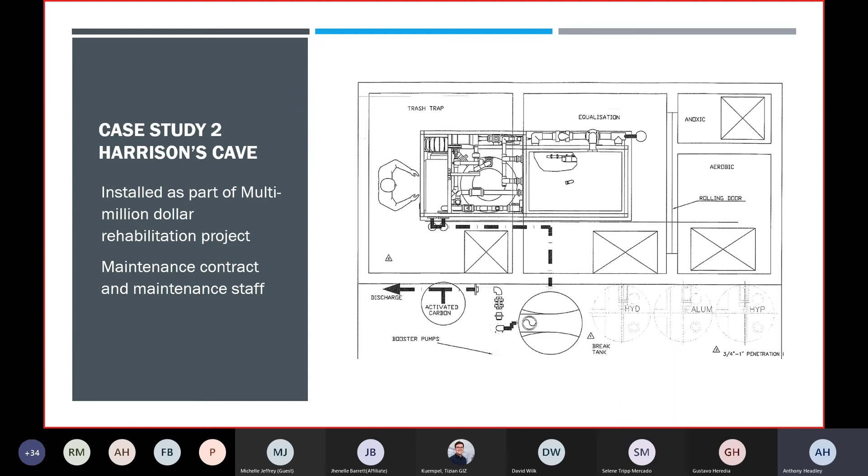Prior to 2000, there were no companies outside of the Barbados Water Authority involved in the maintenance of wastewater treatment systems. Now there are at least three companies that import, install, and manage package treatment systems on behalf of their clients, which we believe is a plus for wastewater reuse and wastewater treatment.

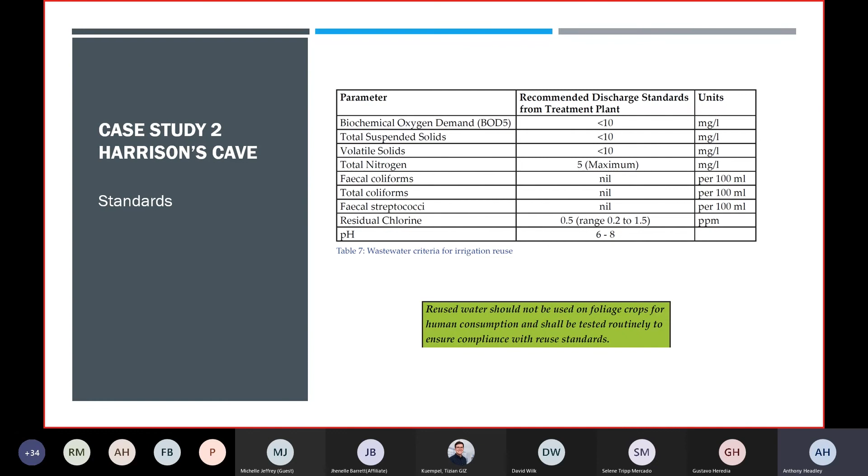For this particular site, the standard used was a bit more rigid. When you look at the BOD, total suspended solids, and total nitrogen, this was coming out of the marine pollution study. I am going over time, so I'll go through the latter part of the presentation quickly.

This is going forward, this is what is being planned. We are planning an update of the South Coast Sewage Treatment Plant. The capital cost for that plant is approximately $105 million. It would include an 18-kilometer pipeline to transfer water from the treatment plant on the south coast to the east of the island, to a place known as River Plantation, a large farming area, where the main limitation is the availability of water.

An important component to note is the addition of the reverse osmosis section on the plant on the back end. This is designed to reduce the total dissolved solids to around 450, which is the mark identified within the FAO standards for water.

When we did a cost-benefit analysis in terms of the agricultural use of the effluent, given the high capex costs, we showed that the cost of the water could be 1.58 Barbados dollars. And if we make adjustments to an economic instrument we are currently using, a sewage and garbage surcharge on the water bill, that cost can actually come down to 63 Barbados cents when spread across the entire island.

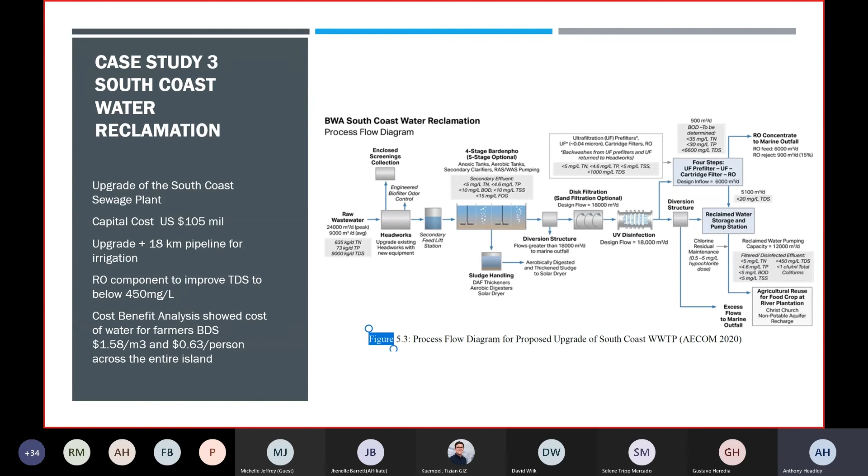Another benefit coming out of this South Coast project is a review of the standards, and we now have two sets of standards: one for potable water discharge into the potable water aquifer, and one for the non-potable water aquifer. These are the standards here.

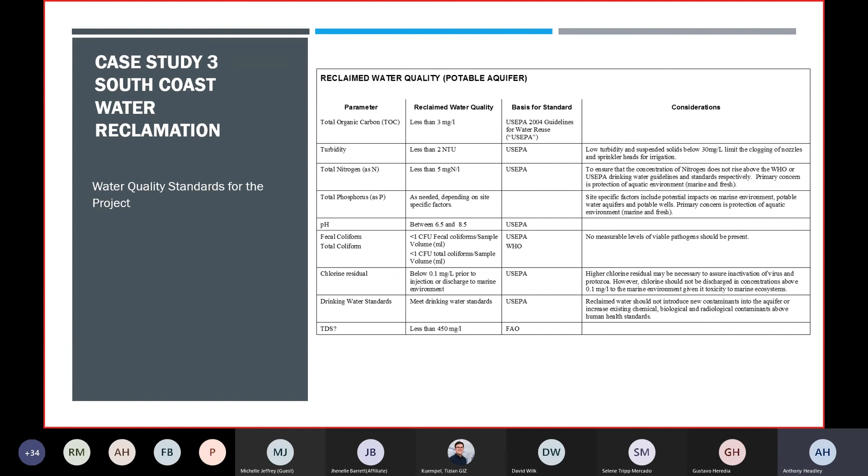Given that I am out of time, I will stop here, and certainly the presentation will be made available to the participants. But quickly, what will happen at the end of this entire process is we expect to have a Water Reuse Act and regulation.

In terms of the health concerns, we're having the Barbados National Standards Institute work on updating the current plumbing code to a dual plumbing code, so that there are clear standards for all persons involved in terms of the color codes for the pipes used for reclaimed water, potable water, etc.

And under the current GEF CReW+ project, we're going to be preparing the communication packages to ensure that we engage all of the stakeholders appropriately with respect to wastewater reuse. And finally, we're looking at establishing the wastewater reuse revolving fund.

That assessment is also being funded by the GEF CReW project. Thank you very much.

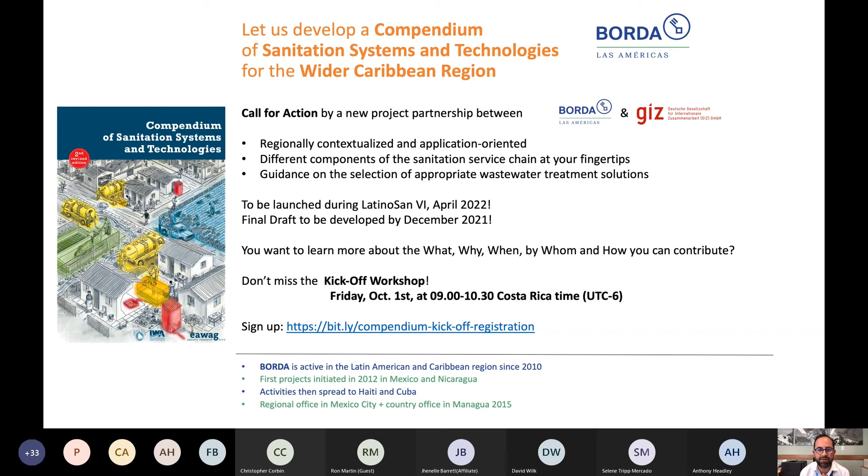Thank you, Chris, for your kind words, and thank you everyone for being here, all 6 sessions. It's been a pleasure sharing with you all this course. Thanks again, and see you soon.